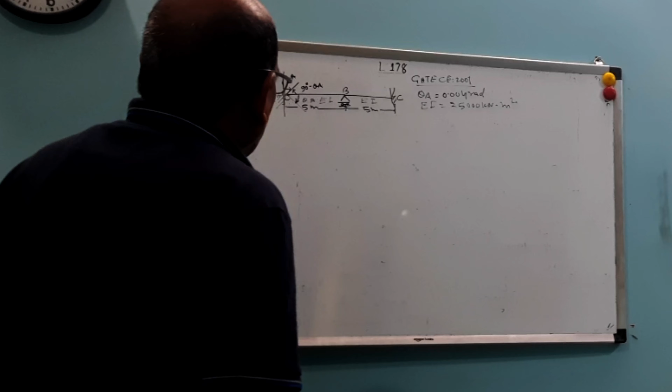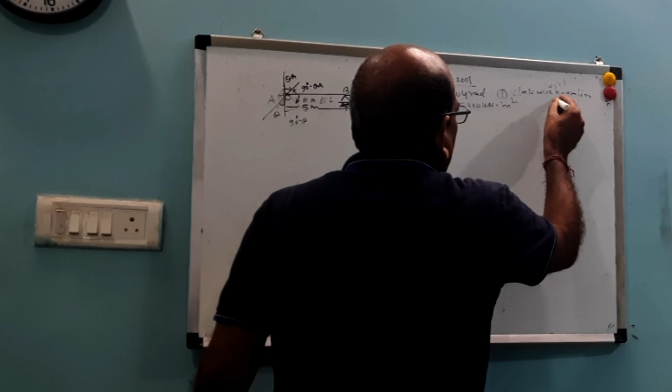This is how we derived theta A - this is your 90 minus theta A, or this is theta A. So theta A is positive because this is clockwise with respect to the beam line, so theta A equals 0.004 radian, clockwise.

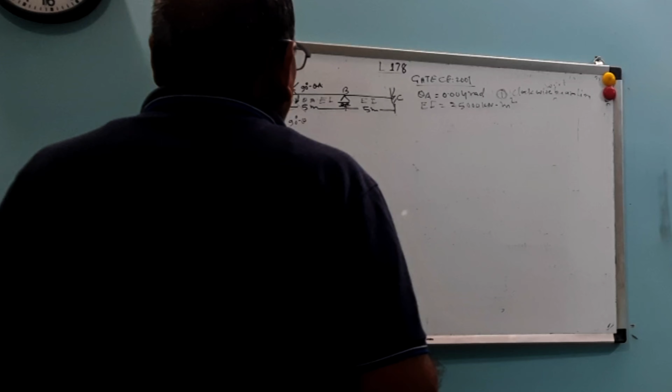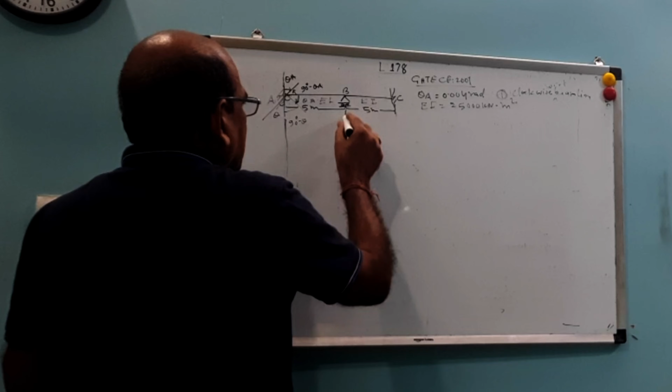Now if asked to draw the bending moment diagram also, we can do that. So let us find out the equations.

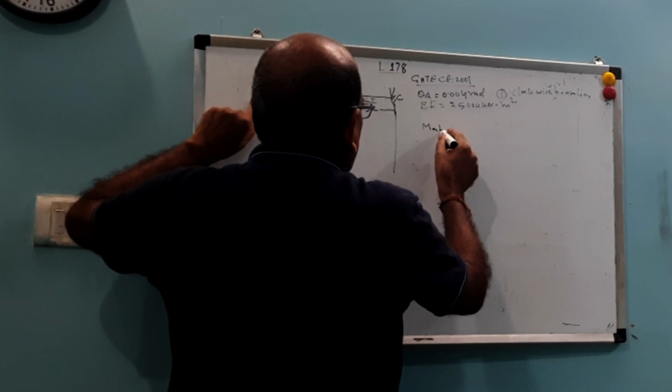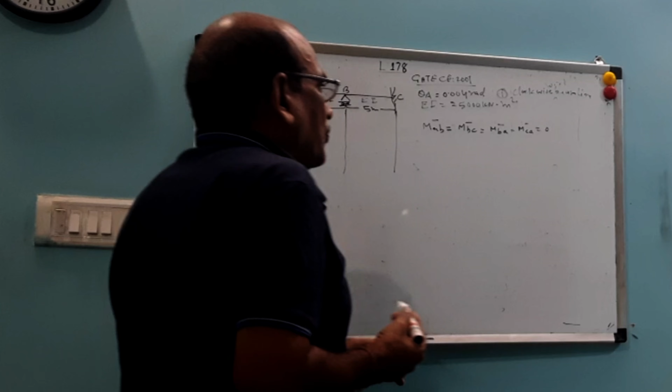If you start from MAB, that is MAB bar equals MBC bar equals MBA bar, MAB, MBA bar, MBC, MCA - since there is no force, no load, these are all zero values.

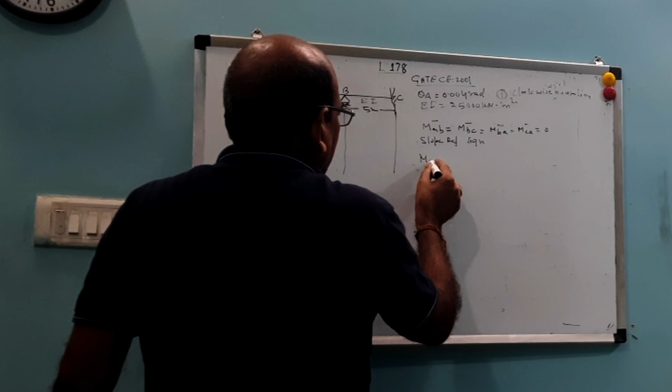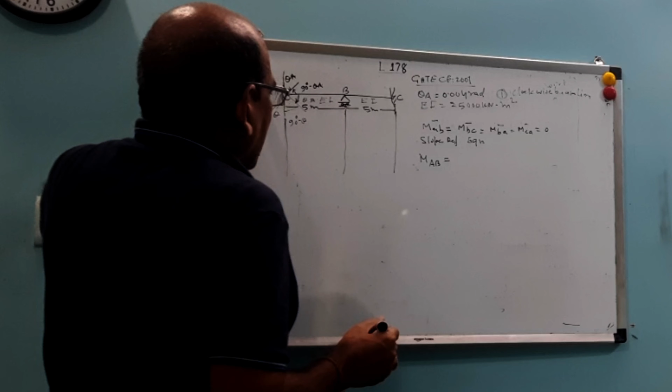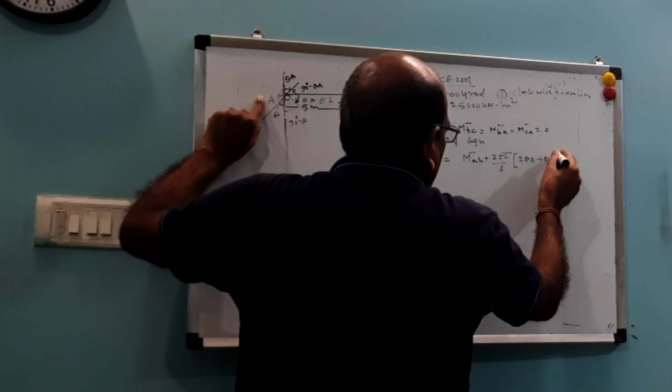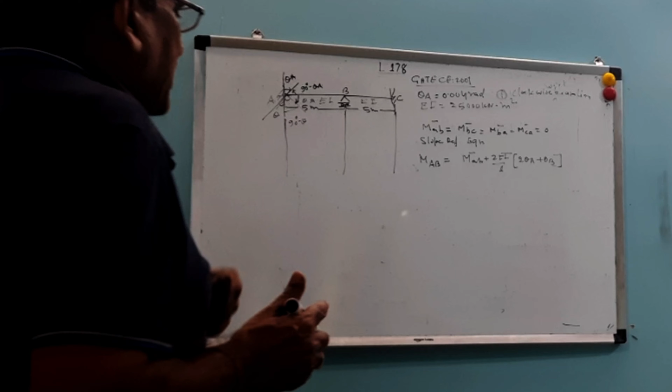Now if you apply the slope deflection equation for A, the free end, MAB equals M bar AB plus 2EI upon L, within bracket 2 times theta where we start plus 1 times theta where we end, if there is no deflection; otherwise you subtract 3 delta by L. So here the equation becomes 0 plus 2EI upon L within bracket 2 theta A plus theta B. This is equation number 1.

The second equation is MBA. MBA equals MBA bar plus 2EI upon L within bracket 2 theta B plus theta A. Since M bar BA is equal to 0, this becomes 0 plus 2EI upon L within bracket 2 theta B plus theta A. This is equation number 2.

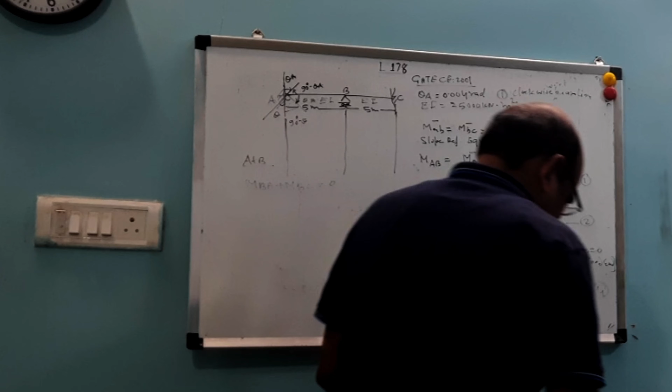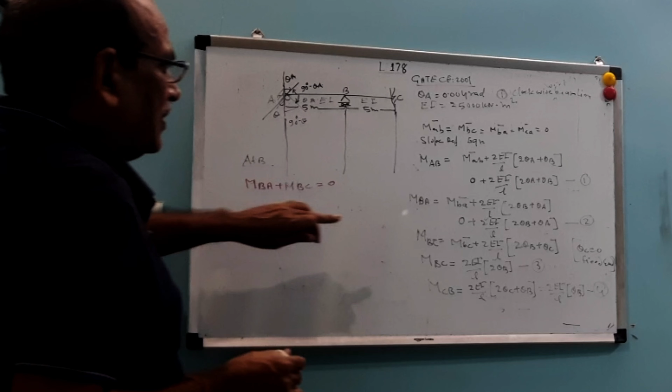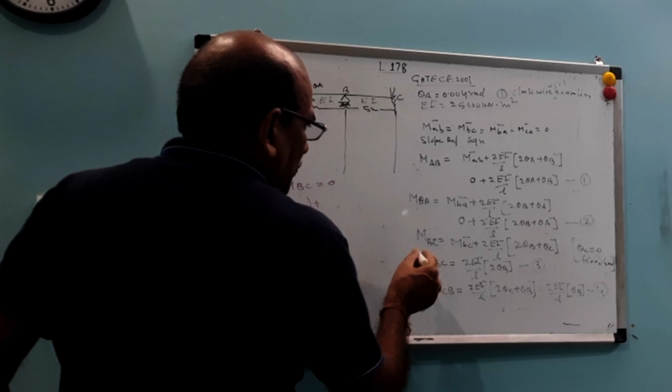That is MBA plus MBC equals 0. Substituting, MBA is 2EI upon L within bracket 2 theta B plus theta A, plus MBC is 2EI upon L within bracket 2 theta B plus 2 theta B. Adding these together, implies...

2EI upon L within bracket 2 theta B and 2 theta B giving 4 theta B plus theta A equals 0. Since 2EI upon L cannot be zero, 4 theta B equals minus theta A, so theta B equals minus theta A upon 4, that is minus 0.004 divided by 4, which is minus 0.001 radian.

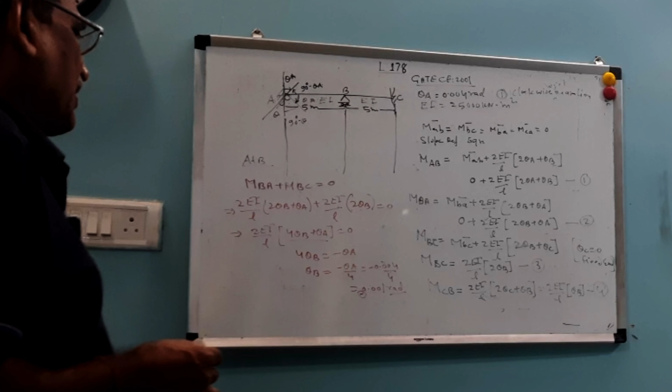This is minus in radian. So your theta B is equal to minus 0.001 radian. Now you can find out the moments by putting these values of theta A and theta B. You can always find out the moment.

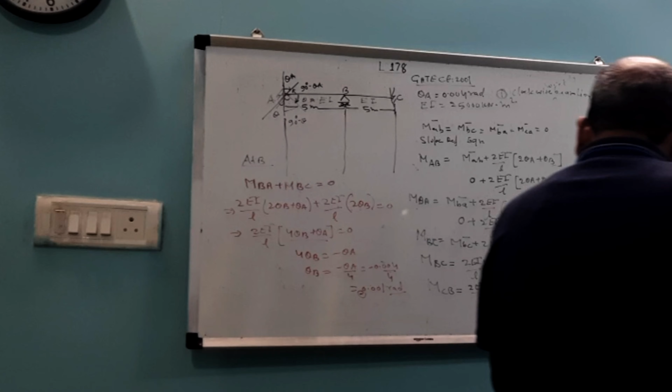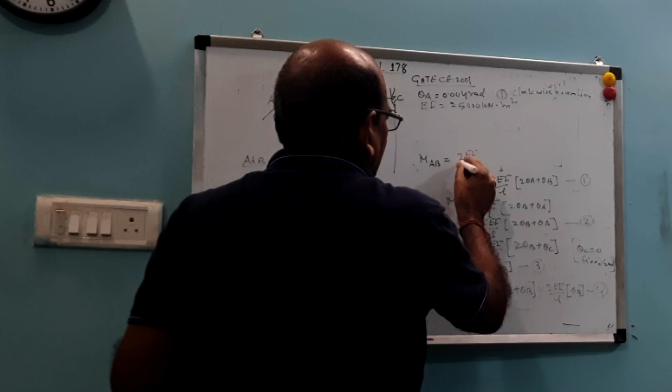If you want to find out MAB, let us find out the MAB. MAB is 2EI by L. This is MAB, equal to 2EI by L within bracket 2 theta A minus theta B.

So this will be your 2 into 25,000 kilonewton meter square divided by 5, multiply by 2 theta, that is 0.004 into 2, that is 0.008, minus 0.001.

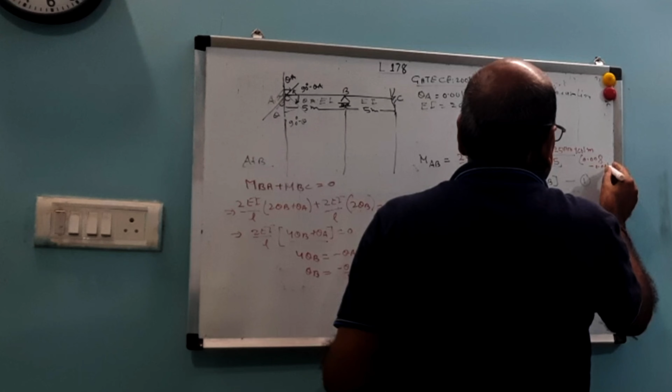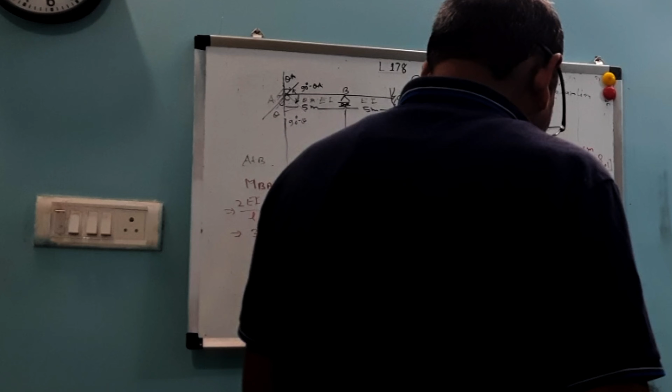2 theta, theta A is equal to 0.004 and theta B is 0.001. So this will be your 2 theta A minus theta B. So this will be like this: 2 theta A, MAB. This will be 0.008 minus 0.001 into 10,000. This is 0.007.

MAB is equal to 2 theta A plus theta B. Theta A equal to, this minus 0.004 into 2 minus 0.001. This is 7 into 10, so this is coming 70. This is coming MAB equals to 70 kilonewton meter. This is positive.

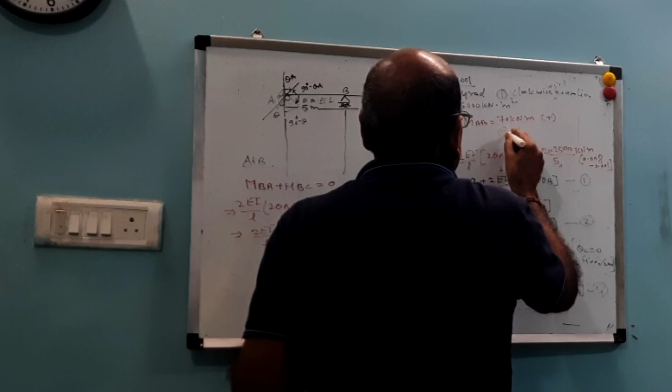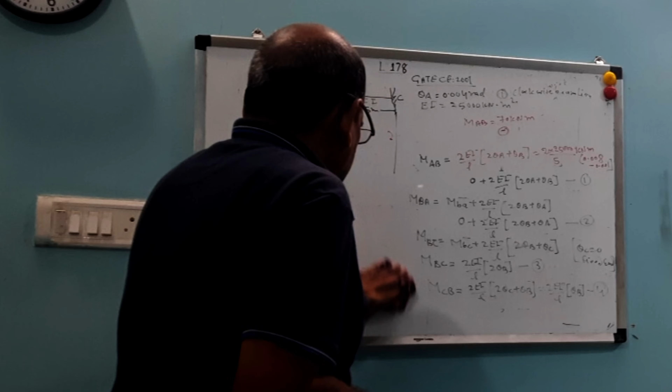Now we can find out this MBA. MAB, MBA. Let us find out the MBA. So what will be the MBA? MBA equals to 2EI upon L within bracket 2 theta B plus theta A.

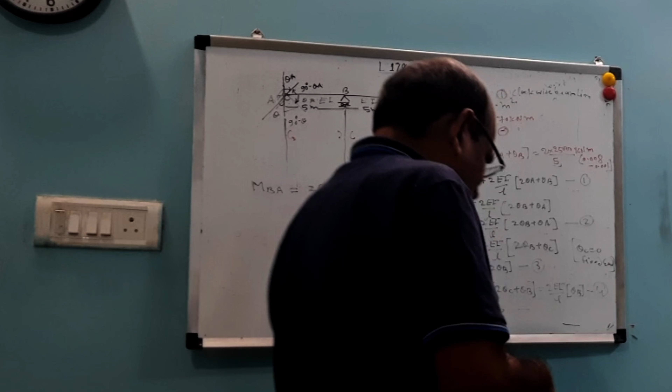So this will be your 2 into 25,000 kilonewton meter square divided by 5, multiply by 2 theta, means 2 into 0.004 minus 0.001.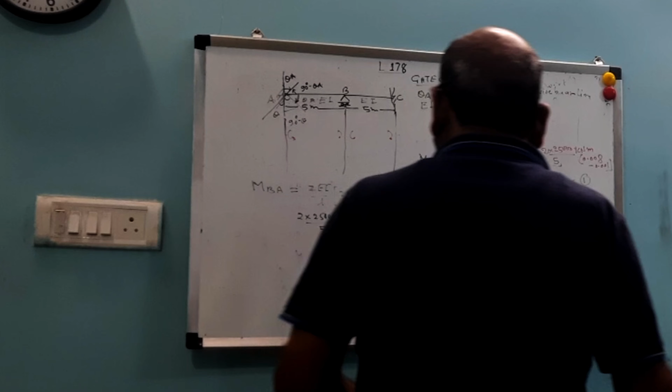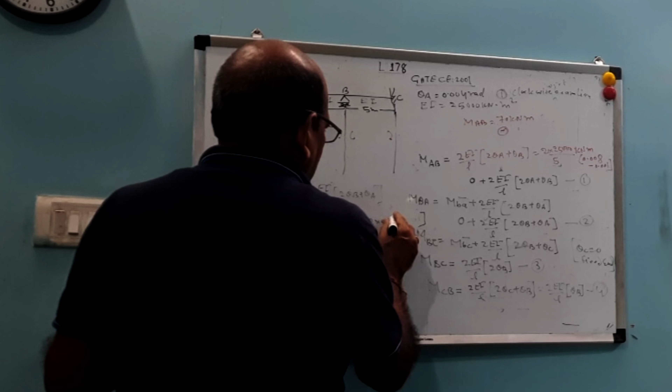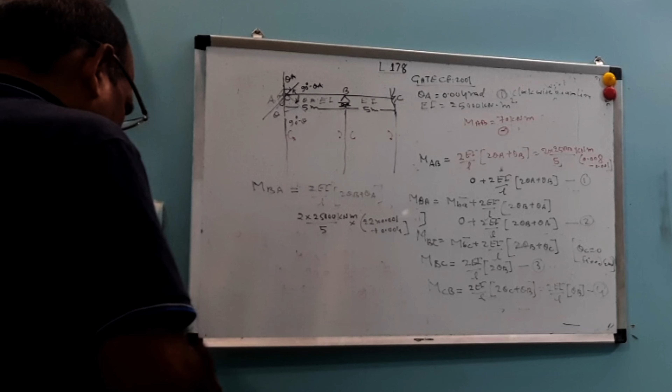So this will be your, sorry, no, this is your 2 theta B, means minus 2 into 0.001 plus 0.004. So this will be minus, that is plus 0.002. 0.002 multiplied by 10.

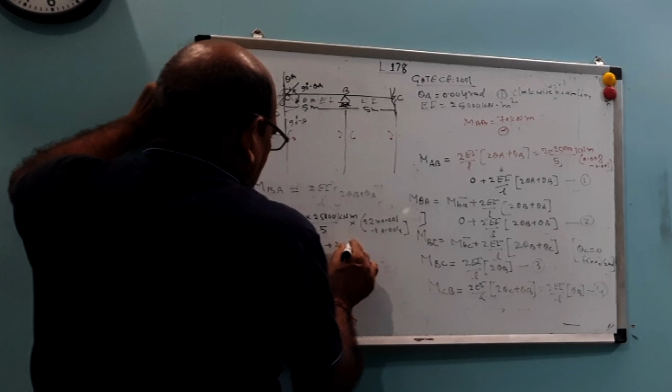0.20, this is 20, MBA. BA your clockwise, so this is your MBA. MBA equals to plus 20 kilonewton meter. Similarly, MBC will be your minus 20 kilonewton meter, negative.

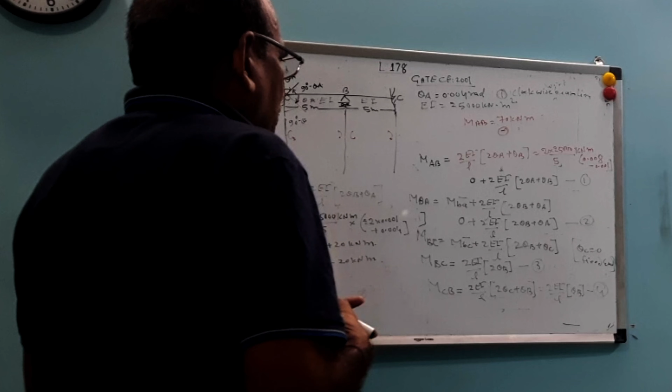And what will be? You can find out this MBA. MBC is 2 theta B plus theta C, but theta C is 0, so directly 2 theta B. So this will be your EI upon L into 2 theta B. 2 theta is equal to 2 into 0.001, into 10, that is 20, this is also 20, minus.

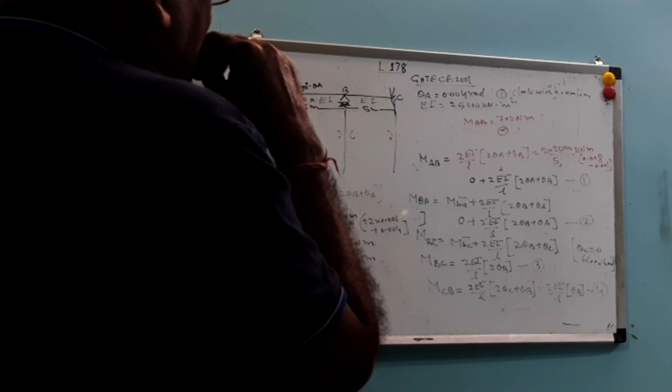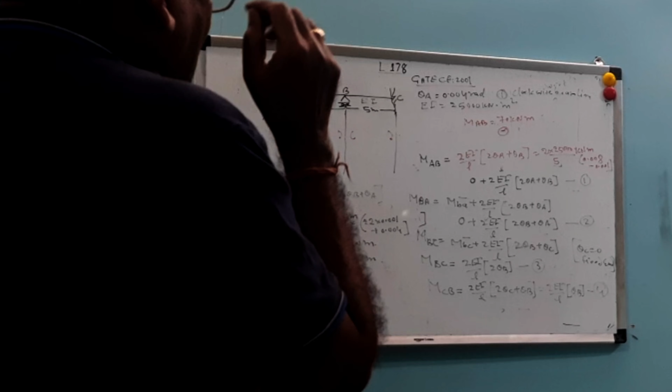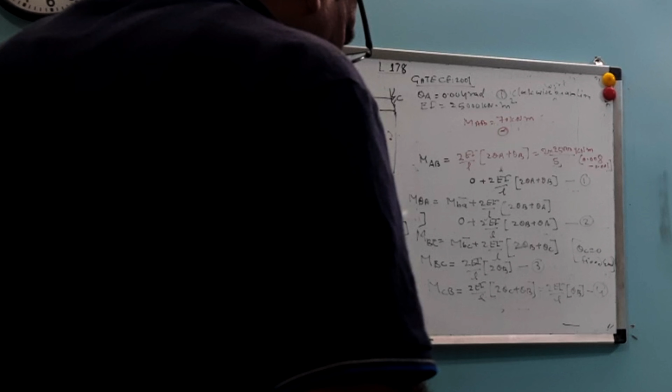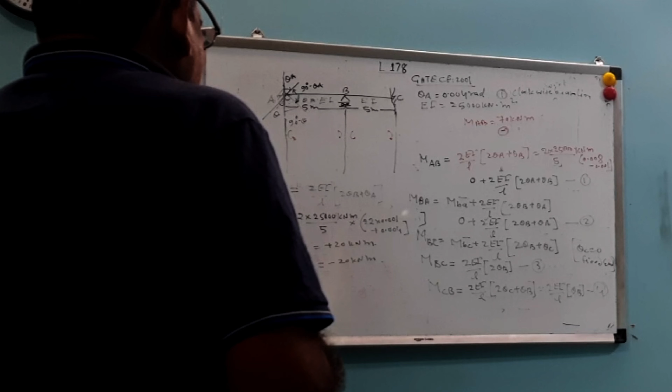2 MBA, sorry, MBA. 2 theta B means 2 theta B plus theta A, and MBC is 2 theta B. 2 theta B, that is 0.001 into 2, into 10, equal to 20. So this is also coming 20 kilonewton meter.

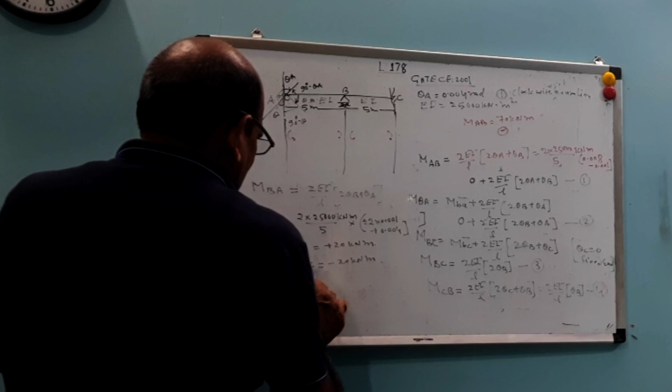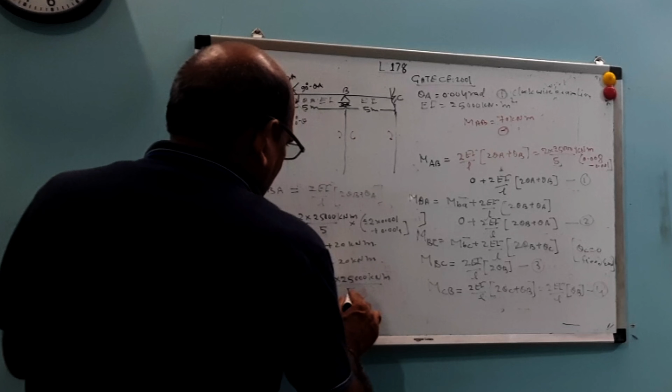Now what about MCB? MCB equals to 2 into 25,000 kilonewton meter divided by 5, into theta B, that is 0.001.

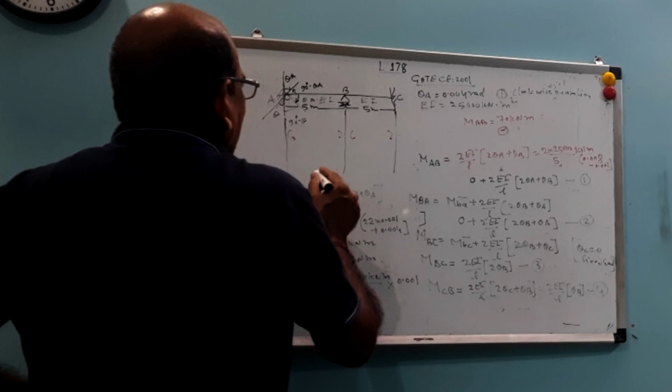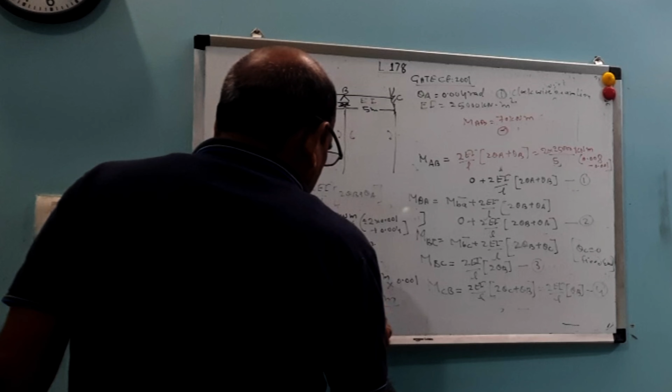This is also, and minus, this is your clockwise, this is your clockwise, this is anti-clockwise, this is clockwise. So this will be your 10, this is your 10 kilonewton meter.

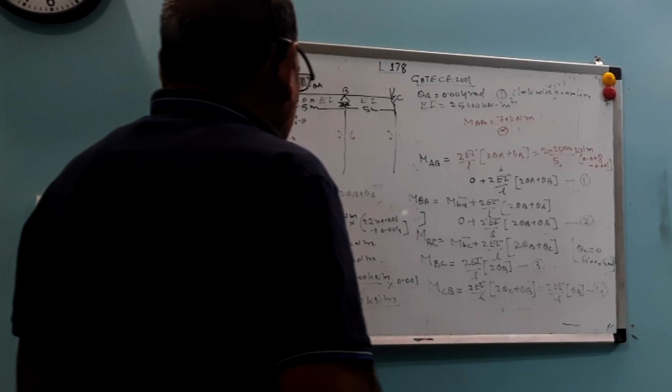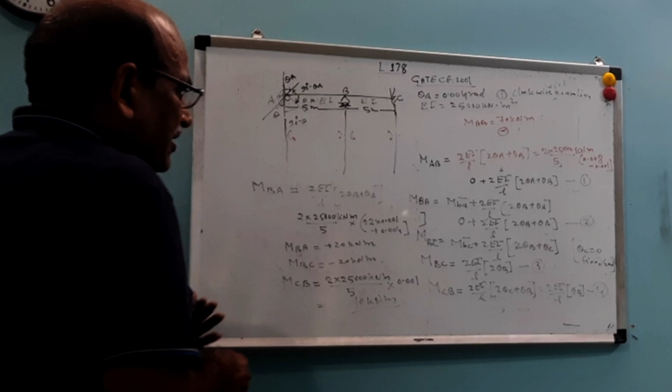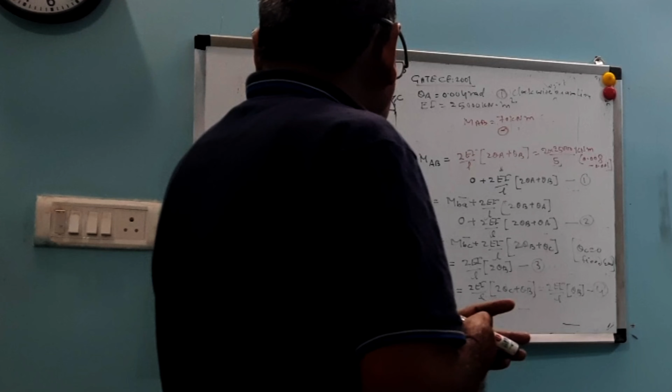This will be your 10 kilonewton meter. Because this is negative, so this will, now we are getting 2 theta B is negative and 2 theta C plus theta B is positive. So this is, because direct this is 2 theta B, so this is negative. This is coming negative, by the way this is coming negative, minus 10 kilonewton meter.

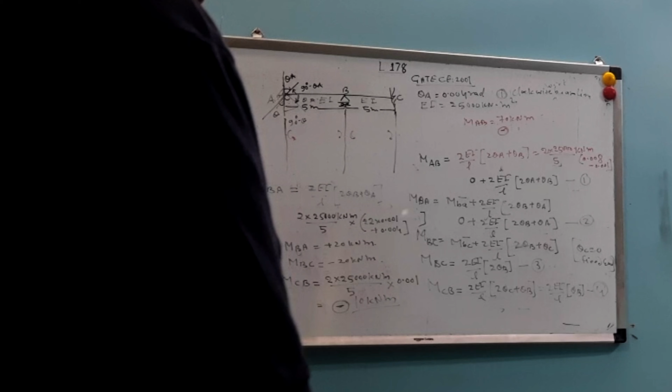So these are the moments: 70, 20, 20 and minus 10 kilonewton meter. So in this way you can solve the problem which is asked in GATE 2001.